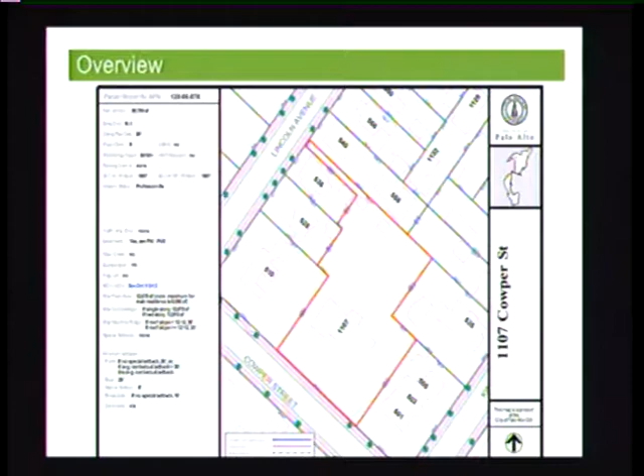So the existing home and the accessory structures on the site, the pool for example, are slated for demolition and replacement with a new single-family house, as well as accessory structures—an ADU, a detached garage, and another accessory structure as well.

This is the house that's proposed. It has a double gabled facade, as well as a longer section down the middle that runs parallel to the street. Materials include shiplap as well as shingle siding on the upper floors. You have a number of features, including dual chimneys, as well as shed dormers and front-facing gables that add articulation to the facade.

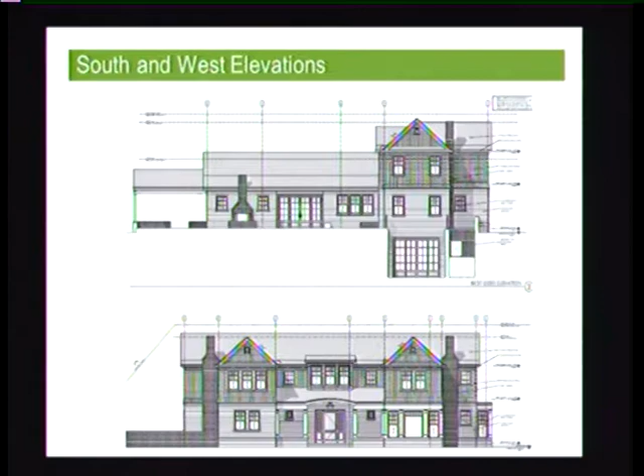These are the south and the west elevations, just showing the wrap of the building all the way around.

We did have M Group, one of our on-call consultants, prepare an evaluation of the project relative to the Professorville guidelines, and I've included that report in the staff report for your review.

In general, the application is, we would say, consistent with the guidelines. There is one important one where it's certainly not consistent, which is that one guideline says we should avoid the demolition of existing buildings. Obviously the demolition is proposed, however it's for a 1997 construction building, so it's outside of the period of significance. The building that's there currently is generally consistent with the character of Professorville, though, so there is kind of a question about that.

However, the other guidelines that seek to ensure new residences are compatible with Professorville in terms of landscaping, materials, scale, and massing—staff feels and concurs with M Group's determination that it is consistent with the guidelines.

So with that, I'll leave it at that. I know the applicant has a presentation as well, but we are recommending that the HRB determine that there would be no adverse impact on the district with this application, and find that the project is therefore exempt from CEQA under guideline section 15303. Thank you, Graham.

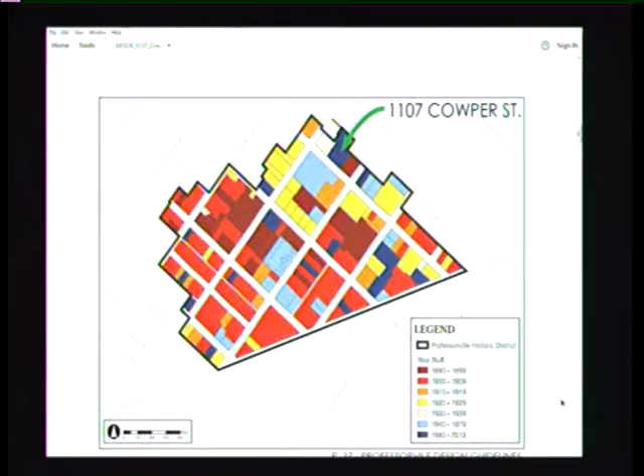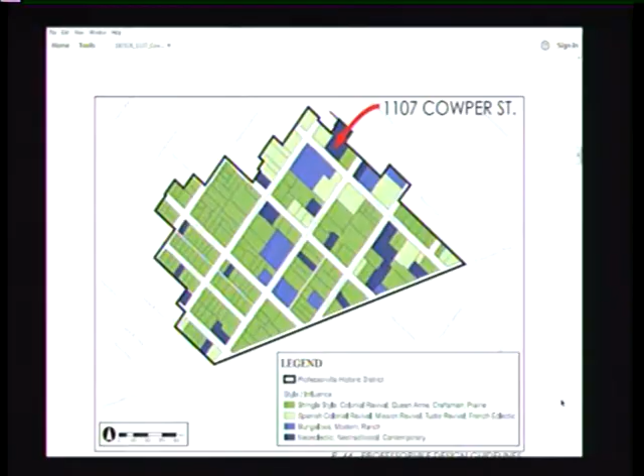When we first started the project with the owners, we looked at either doing a remodel or a new house, and weighed the pros and cons. One issue is that the existing house has a partial basement with small light wells, and the new owners really want a full basement for their family, with light wells meeting egress requirements.

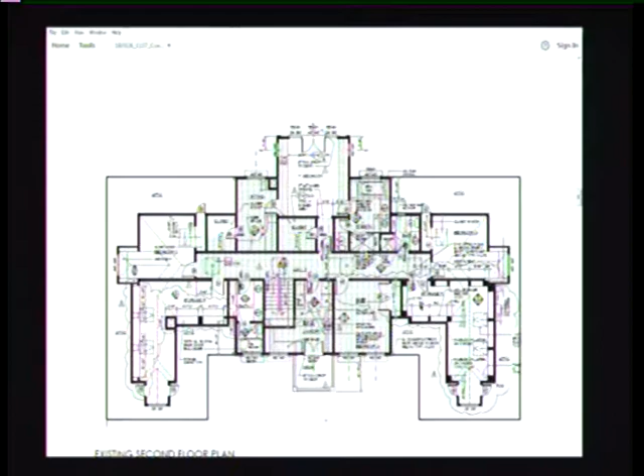After that, we concluded that new construction was the better approach, because it would actually take a longer construction period to make all those changes to the existing house rather than just doing new construction. That's also beneficial to the neighbors, resulting in a shorter construction time.

So this is a front rendering of our proposed design. We want to take you through some of the design elements on this. In the following slides, I'm going to show precedent images of houses in Professorville.

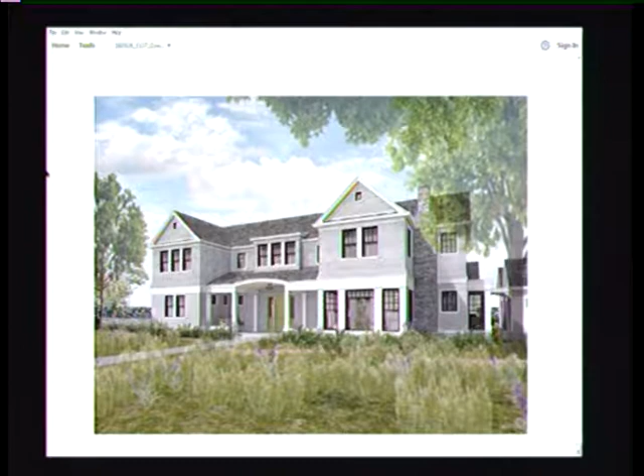Martin: Thank you, Kristen. Can you go back to page 15, please, of that report? Page 15, thanks. Yes, this one? 15 of our packet? No, 15. Oh, she has it on the screen right now. Great, oh there, okay, great, thank you.

Did you have a comment, Martin? No, I just wanted to make a copy of it. Oh, all right, thank you.

So I have a question for you. Do you know the date that this property was purchased by the current owners? Recently, but I don't know the exact date. Was that before the Professorville design guidelines were established? When the new owners bought it? No, it was after.

I'm going to ask a couple more questions while my colleagues gather theirs together. I notice on the front, page A0.00, the dormer that's over the front door on the second floor, sorry, I just want to look at the same thing you're looking at. In this view, it looks like there's relatively substantial detailing right above the windows. Yet on your elevation A3.00, it looks significantly different. Are these developed? I'm not quite sure what's going on there. I understand this is a very reduced set of drawings, and it's early.

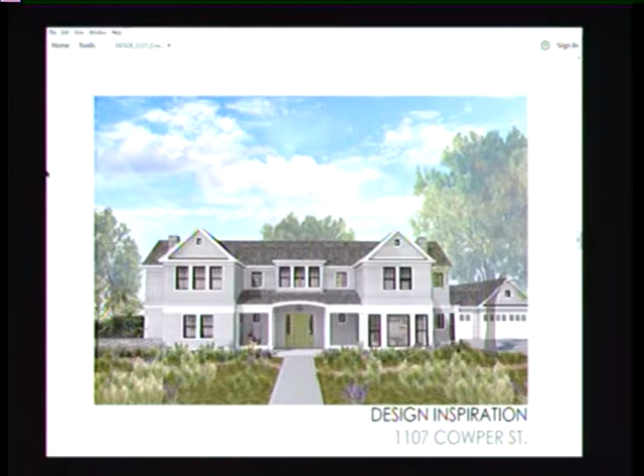I think you're referring to the dentils and the wood trim that's happening. Right, yeah, I don't know if it's dentil because at this 30,000 foot level it's very difficult to determine what's going on there. But I'm just wondering if you could describe which of these drawings depicts what's happening. So the one on A3.00 is correct. The one you're looking at on the screen is maybe a little bit different. We've added a couple more pieces of wood trim, but for the most part it's the same. The pieces underneath the eaves are a wide white wood trim, and then it's got dentils underneath that, which if you look at this precedent image, it's a very similar detail to that house.

Okay, let me ask a different question now. I noticed that the accessory buildings at the rear of the property are very close to the property lines, and yet this site is almost an acre. In fact, I think the pool house encroaches on the rear setback, and I presume that's allowed by zoning. Yes, that's allowed. Is there a reason why these have to be so close to the side yards, especially the entertainment room, the one on the right rear, which I would imagine would generate some significant noise if you're entertaining.

Can I speak to that? There's a very large oak tree on the site. If you look at the site plan, it's shown with this large dotted line. So we needed to be very careful not to disturb any of the roots. That really drove it. What page would we look on? A1.11 would be a good example. You see the tree on the rear half of the lot with the dotted line. That really drove putting those two structures in the corners in order to avoid the root structure.

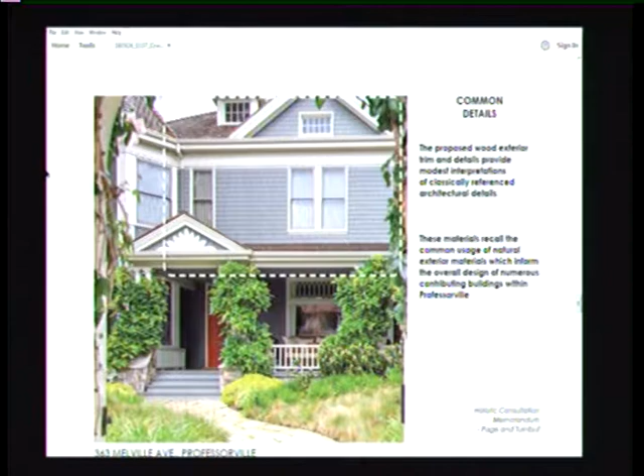Okay, yeah, that's it, thanks.

Roger, I have a modest question. When you look at A3, the front of the house, somehow in my world, when you have a long house like this with a gable roof all the way across, at each end of the home it's a serious block. So when I make the ends a hip roof, and it reflects the shape of the dormers in the roof, it tends to finish the house, to make it feel done. Whereas with gable roofs like this, you're never sure if it's done, because you can just add on to the home very easily. There's no end to the house.

Are you saying we currently have a gabled roof, and you're suggesting a hipped roof? Yes, that's just kind of my thought working on homes in that neighborhood. We usually try to... I don't know, to me it looks like it's never ending, but when you put the hip on the end, that's the end, and that's it. But that's just my own weird kind of thing, so that's all I'm commenting on.

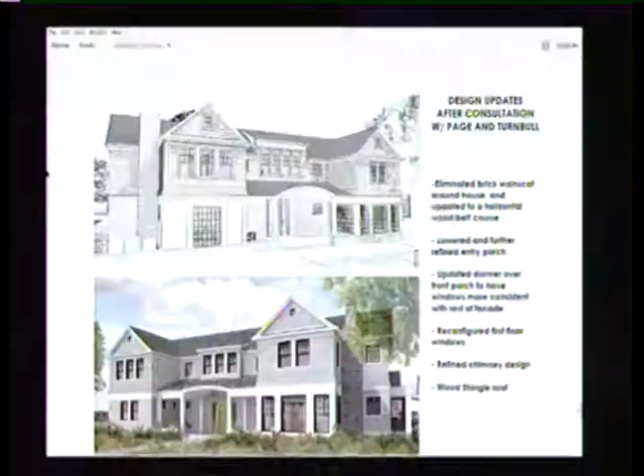That might address Board Member McKinnon's idea that this building looks like it's just sitting on the ground. So that might just be a detail clarification when you actually submit for the building permit. And then, on the other suggestion about putting hip roofs on the ends, that would introduce a third type of roof shape here. Right now you've got the shed dormer in front and then gables. If there was a shed, gable, and a hip, that might start adding more visual confusion about what the structure is. So that's why I would support the gable ends as you're presenting.

Okay, thank you. No other questions, thank you for the presentation. We'll probably want to ask you other questions, so please stay and have a seat, you don't have to stand up. Thank you, it was very informative. Okay, coming back to the board for discussion.

Martin, would you like to start, or did we jump around? Well, I'm prepared to make a motion, but I'll hear other comments first. I can start with a motion if you like, or maybe there's other board member comments first. All right, anybody have a comment? Margaret, your light's on. Sure, I'll make a comment.

I think this is definitely further developed than when they presented it the first time, and I really appreciate that they went to Page and Turnbull and had a very good observation summarized in a report. I wish we could have had a copy of that, because it would have been an interesting report to have as part of their application. But they clearly listened to our comments during the study session, and they took note and incorporated a lot of it into their design.

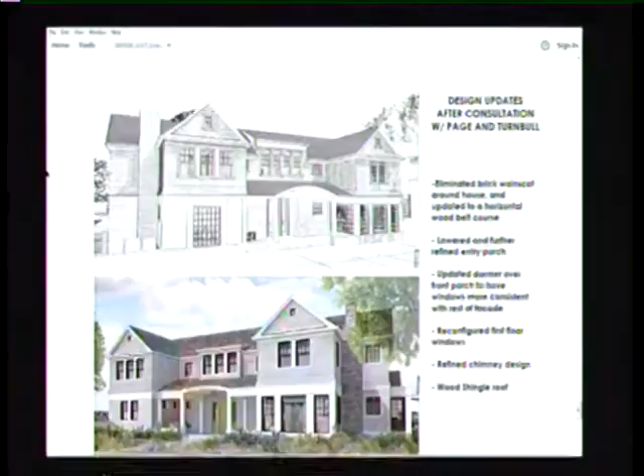I'm appreciating that. The only thing about the arch in the front, my reaction to the composition of it is that it seems too flat and too broad. There's probably a correct dimension for what that needs to be. It seems like if you could lift up that arch 12 inches, it would announce itself more as an arch, instead of being flat and trying to be an arch but not quite succeeding. I think it would be nice if we could lift that arch up a little so it reads more clearly as an arch. In this slide it just seems too flat, it doesn't really have the prominence it needs since that's your focal point.

The other thing, I'm not super crazy about the shape of the chimneys, how it goes up to the roof line and then curves in. Usually I see that kind of chimney style where it's wide and then narrows before the roof line, and then narrows up to the roof line. It looks like you're using brick for that chimney. Maybe take another look - there are great examples of really beautiful chimneys that are very simple, but at the top the brick coursing steps up and down. Even if you went straight up with it, make it prominent and use that aged brick. I think that could be an improvement.

One other comment that's not historic related, but on the garage - looking at the roof line, it looks like you have a double gable facing the house. Between the house and the garage there are two gables, so you have a valley, and with water you can get a lot pouring between the house and the garage. Looking at the grading and drainage plan, there don't seem to be any provisions for taking care of that water. Maybe you could flip the roof line of the garage so the water goes away on the side of the house, or maybe have a rainwater collection system, that would be kind of cool. I know that's not historic, but I was worried about the water. That's pretty much it.

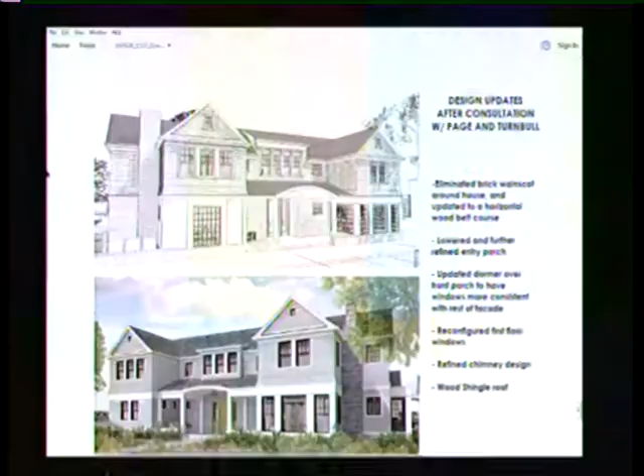Can I just say one thing? I forgot about that. Regarding the porch trim, if you incorporated that porch beam thickness, and took the point where the top of the column meets the porch beam and struck it up to the current underside of the arch, which is probably your maximum height, I think that alone would raise the height of the arch along with the width. I think that would make a huge difference because you're working within the parameters - I think that's what's missing. And with that white painted trim, I think that would be beautiful, and it would lift the radius of the arch. I think that would be an improvement.

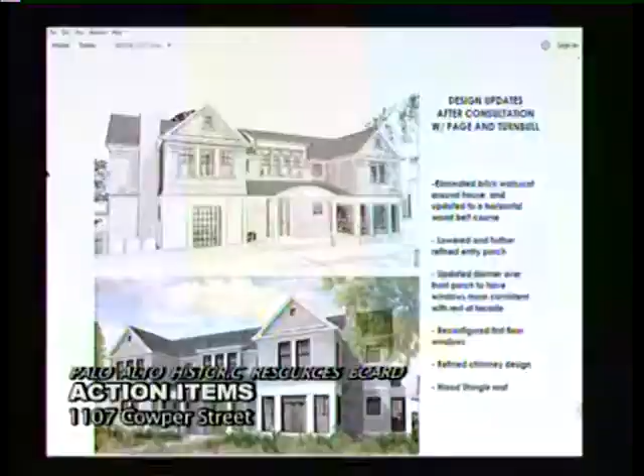Okay, I'd like these points addressed, but I'll propose a motion that the house design is approved subject to the alteration of the thickness of the entry arch and the shape of the top of the chimney, agreeing with the top rendering on the screen - so it's a consistent dimension all the way up, rather than having it get narrower as the chimney arrives. And with those conditions, that the house be compatible with the guidelines for Professorville.

Can I also include in the motion that the detailing to emphasize a plinth is more visible, more pronounced? I want to be clear what your proposal is about - is that the top of that rendering? Yes, so the same dimension all the way up. For clarity, the one on top was the iteration of the formal design proposal.